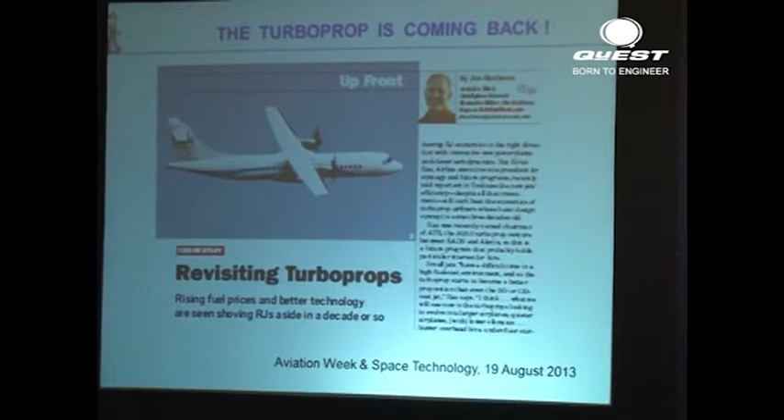Rising fuel prices and better technology are shoving regional jets aside in a decade or so. 10 years - 10 years is all that this man gives for regional jets. And he says those regional jets will be overtaken by turboprops. Well, I think that's likely. I mean, this is in fact what some of us have been feeling.

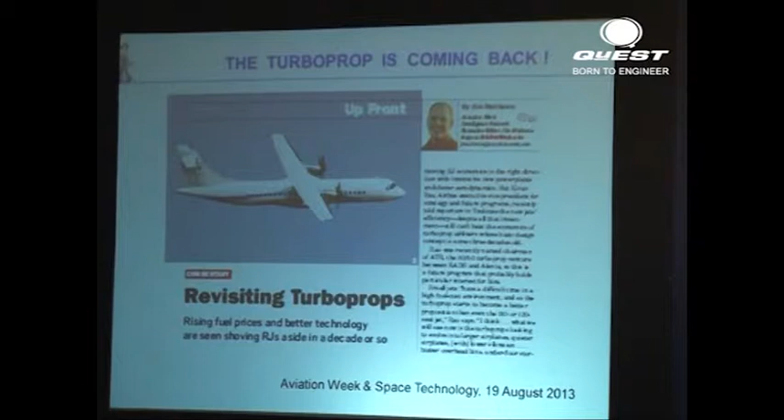Another person who feels the same way is Kota Harinarayana. So we've been feeling that the turboprop needs another very close look. It is true in some sense that turboprops are relatively old technology, because the ones flying now were designed 20 years ago, 15 years ago. Some of the advances made in all these disciplines have not actually been fully exploited in turboprop design. So I want to tell you what we should do, and what I'm going to talk about today.

In the first place, the world is turning towards greener aviation. Climate change is a serious concern, and greenhouse gases, although the contribution of aviation is very small, a few percent, 2% or 3%, everybody has to be greener. I already said that the turboprop is inherently more efficient.

If you look at the structure of civil air traffic in India, and I'll come to that in a moment, it is dominated by routes shorter than 1,000 kilometers. Especially if you look at tier 2 cities and towns, the distances are actually much smaller. The turboprop has this perception problem, but I think today it's possible to design a truly modern turboprop. It's not only modern inside, but it will look modern outside as well.

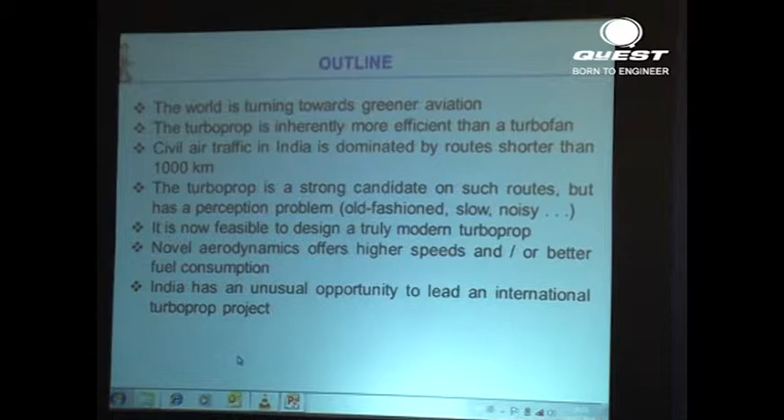Some of the aerodynamics that I'm going to describe widens the range of choice we have in aircraft design. We can use this kind of aerodynamics either to increase your speeds, if you think turboprops are too slow, or improve fuel consumption if you want to fly at the lowest cost possible.

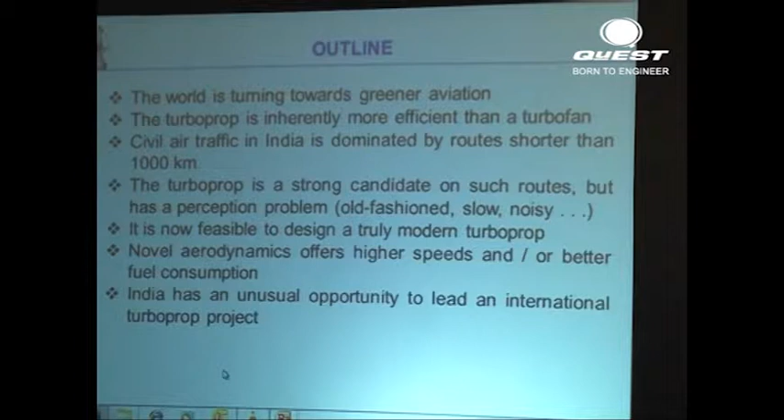Because our market is so large and it's growing, given the right policies in civil aviation, I think India has an unusual opportunity here to do a project which can be internationally interesting.

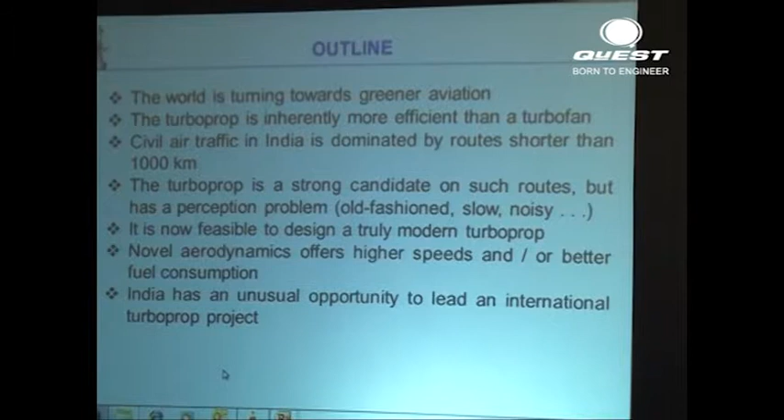Let's see, page down, is it? Okay. Okay, I see, all right.

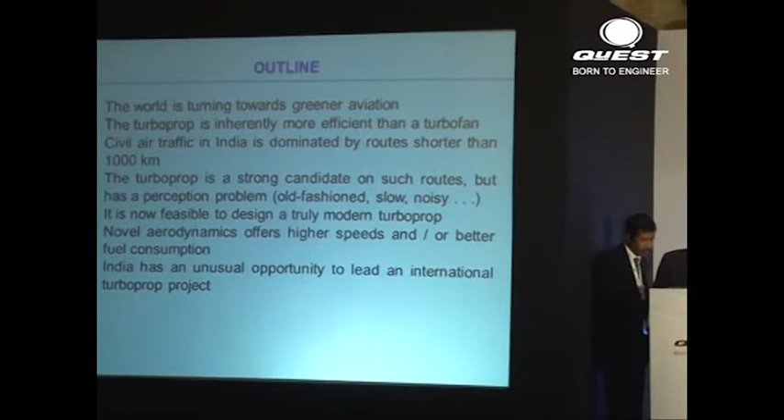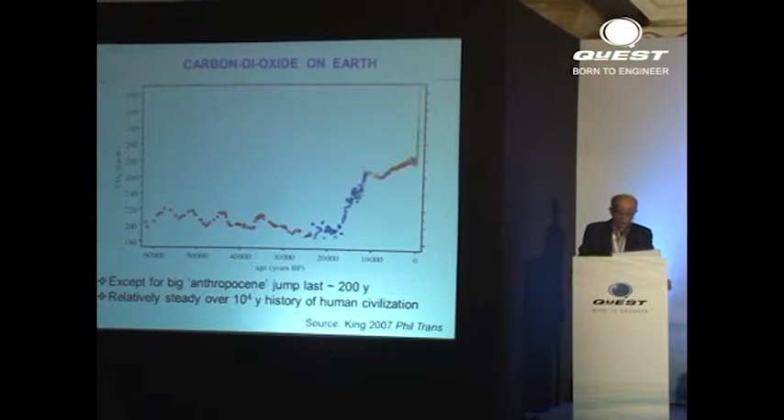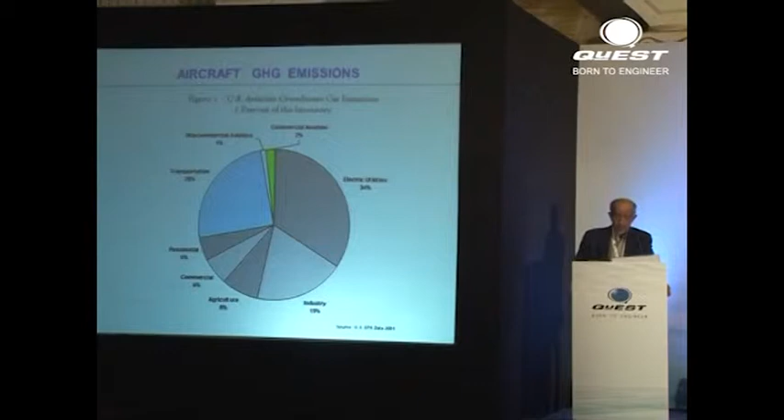So let me say just a few words about green aviation before going on. That's the way CO2 in the atmosphere has been increasing. You see that last thing out there to the right, that's how it has increased in the last 150 years since the Industrial Revolution. A lot of analysis made by huge international groups shows that the chances this will change our climate are getting stronger as time goes on.

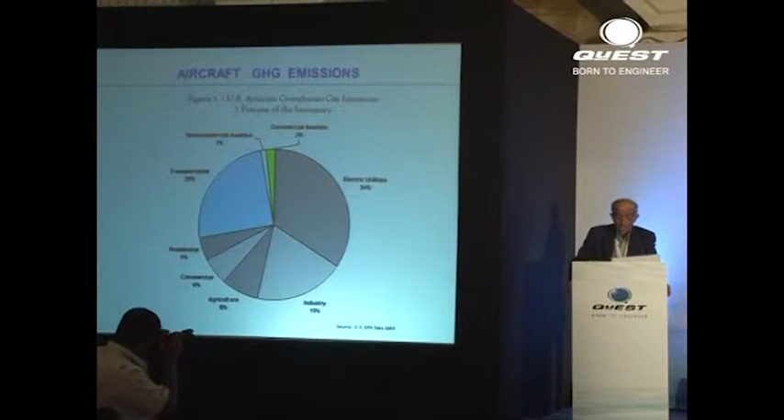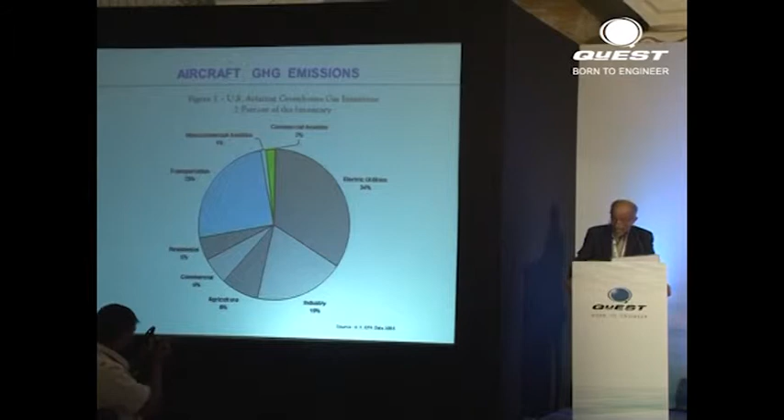If you look at commercial aviation, it contributes only 2% to greenhouse gas emissions. Nevertheless, everybody will now have to chip in, and therefore greener aviation is a major project.

So the temperature of the world is likely to go up by the middle of this century, the 21st century. It will be 2 degrees, 3 degrees warmer, and may eventually be as much as 4 degrees by 2100. That can make huge differences to the climate of this world. And oil prices, as I said, have been fluctuating, are now quite high, and all of that changes the economics.

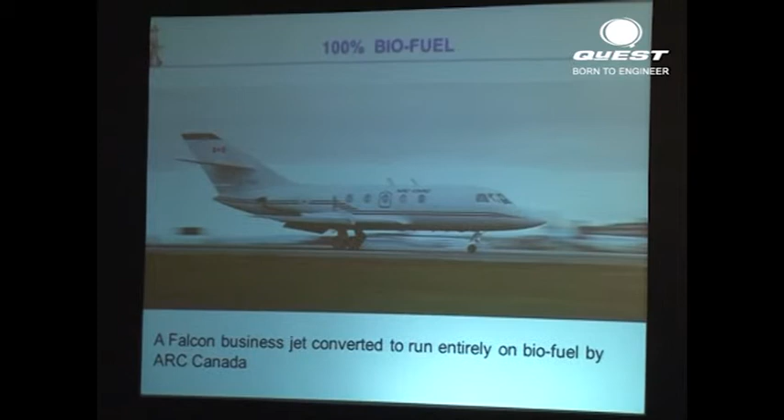NASA has a SUGAR project, subsonic ultra-green aircraft research, all kinds of sugar, as you can see. Free sugar, refined sugar, super refined sugar, and so on. They're also looking at how you can make aircraft greener, for example running it on biofuel. Here's an aircraft, a Falcon, which has run entirely on biofuel, on a project in Canada.

Here are some stranger aircraft. Look at that solar aircraft at the top. Lots of propellers, by the way, a whole series of them, you have to count them.

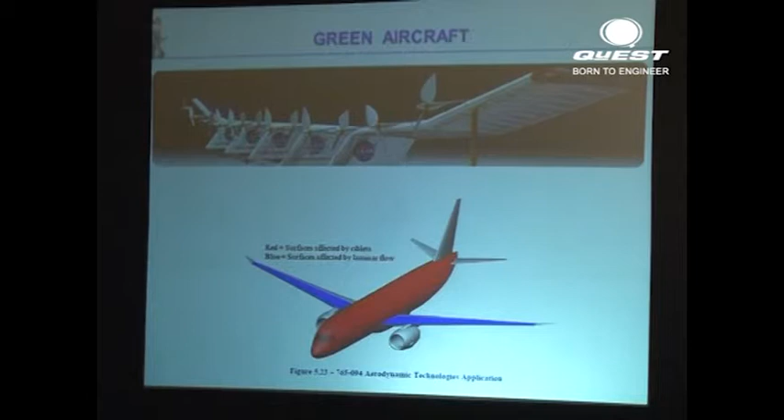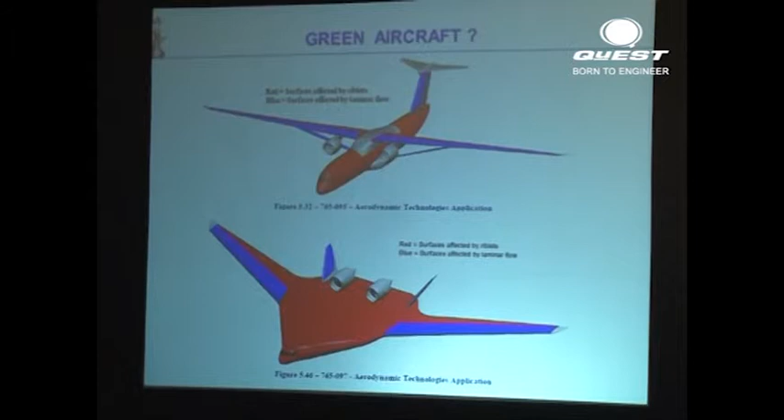There are other methods of improving aerodynamics. Riblets, for example, surface riblets are known to cut drag. Laminar flow surfaces are also known to be possible. However, cost and maintenance problems have actually hindered the introduction of these new technologies. So braced wings may come back, being structurally more efficient. Similarly, blended wing bodies with the noise from the jets shielded by the two tailplanes. So there's a whole wide variety of concepts being considered now.

Now, what can we do in India? We can wait for those green products to arrive from abroad, or we can develop our own green technologies and join green efforts everywhere. But in aeronautics, we have an opportunity now to make green coincide with being economical, which the Indian public loves, and being profitable—otherwise it wouldn't be done. So I think there is a unique opportunity here.

Fuel accounts for a considerable fraction of the direct operating cost in India on aircraft. It is heavily taxed by international standards. And partly because of the policies and partly because of the taxes, the funny thing is that the presence of Indian Airlines in foreign skies now is less than what it was when I first came to the United States. It's astonishing. It's a smaller fraction now than it was in the 1950s. In recent decades, it's steadily gone down.

I think our deregulation has, of course, lowered fares, which is a good thing. It also has lowered profits, and many airlines have actually lost huge sums of money. But I think part of the reason for these problems are also technological and business-related. And I want to look at the last factor a little bit more.

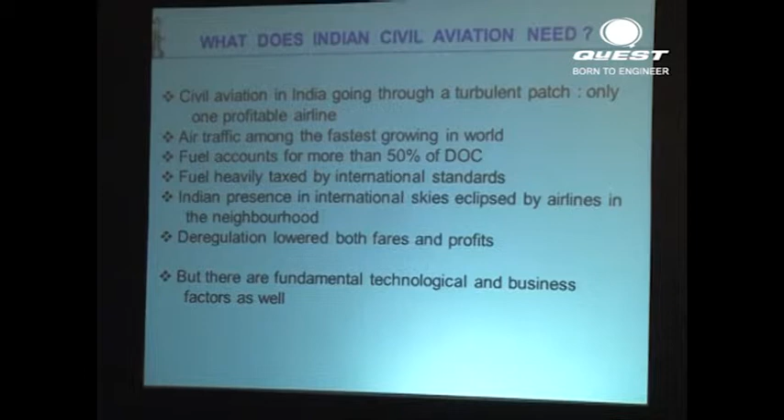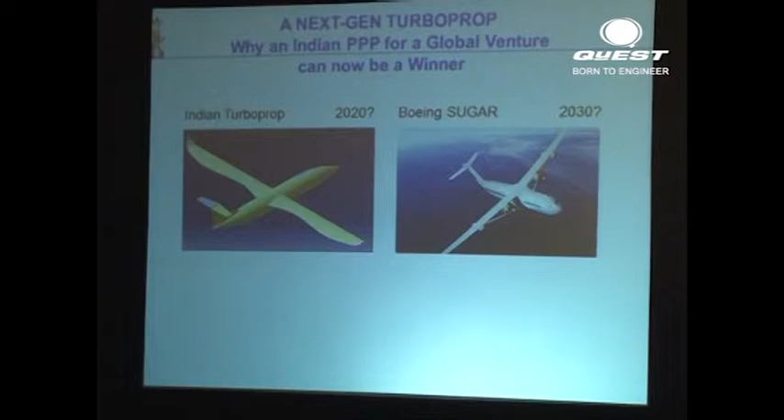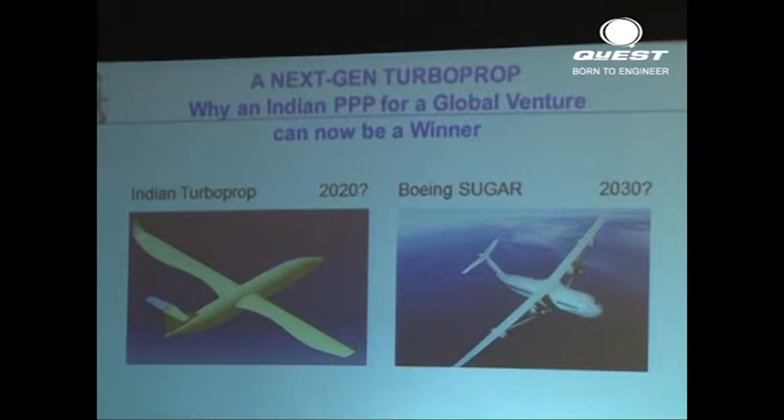I want to say a few words about what a next-generation turboprop might be like. On the left there is a turboprop, which is the kind of wing that we are proposing. By we, I mean a team of us who worked on this project. That team includes my colleague, Professor S.M. Deshpande, at JNC, Dr. Praveen, who is actually at TIFR, in the Center for Applicable Mathematics, also in Bangalore, and Rakshit. Rakshit joined me as a student, worked on this project, and is now with Airbus right here in Bangalore.

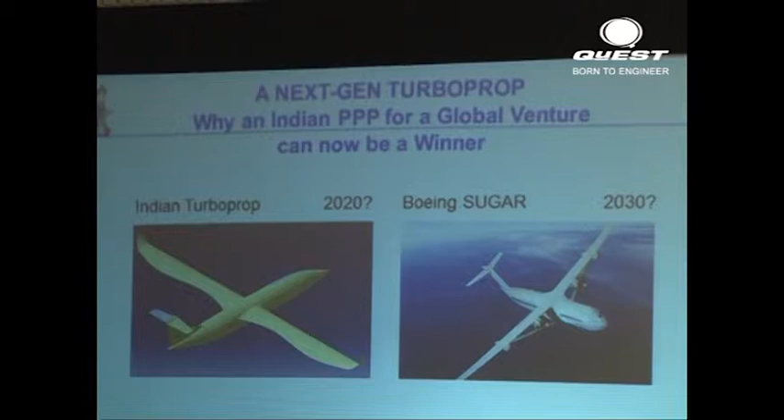So a wing like that, the one that I have shown on the left, is something that actually provides us with more opportunities for reducing drag or increasing speed, as I said. And I'll show you why in a few minutes. So let me go through this.

Nobody can make a successful aircraft in the world now unless it sells in Asia, because it's one third of the market. And the people who have seen this right away are the Chinese, who have a huge civil aircraft industry now, growing very fast. India has been very slow to see this. We still don't have a significant civil aircraft project at all. But if one third of the aircraft are being sold in this part of the world, sooner or later, we will have to start making our own.

If you particularly look at the structure of Indian traffic, what is plotted here on the y-axis is the number of seats per week in thousands, that Indian Airlines carry today. And on the x-axis is the route length in kilometers. Now the peak occurs at 500 kilometers. Now 500 kilometers is good turboprop territory. Really, a jet is not very economical at all at 500 kilometers.

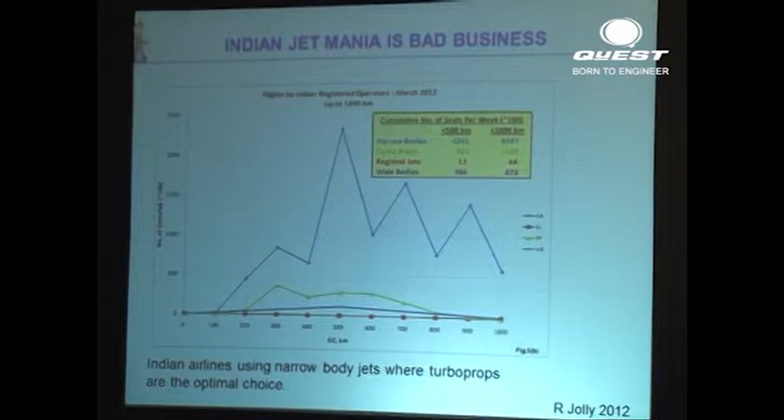But what are we doing? We are actually flying these 500-kilometer routes using narrow bodies. Even regional jets are a very small fraction. In fact, they're so small that they just hug the x-axis here. Turboprops are the green ones. That's the second curve from the top. You can see that the number of turboprops is pretty small.

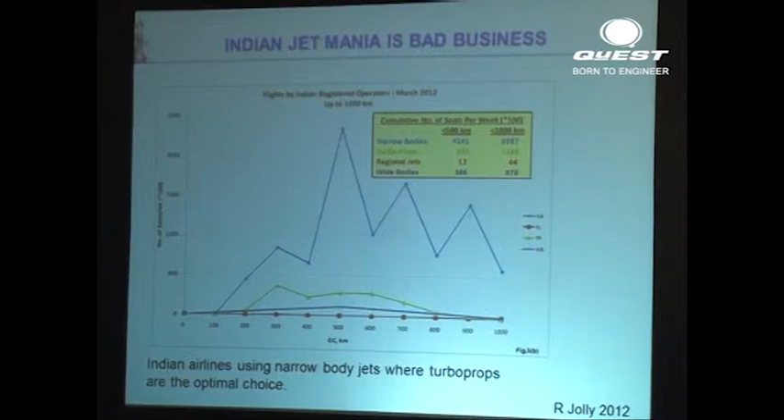We are using the wrong aircraft for the route structure we have in our country. As you go towards 1,000 kilometers, regional jets and narrow bodies do become appropriate. But just because we have these, and just because the law requires that you fly a certain kind of route, we use the same aircraft for all routes. Doesn't make economic sense.

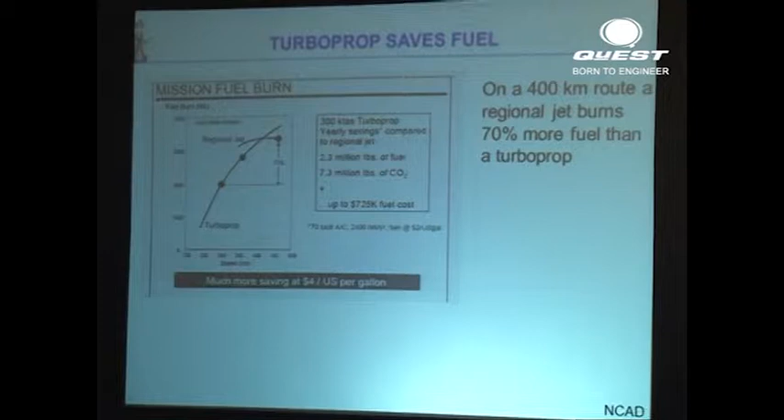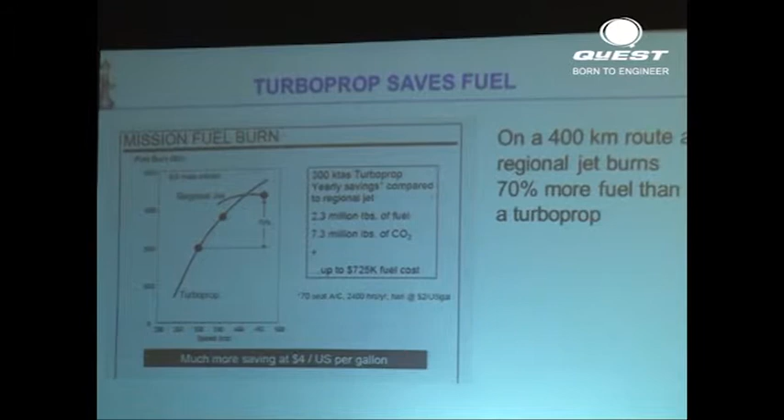On a 400-kilometer route, which is quite common in India, a regional jet burns 70% more fuel than a turboprop. At first, people look at that figure and say, can't be right. It is actually right, because the jet burns a lot more fuel than a prop does.

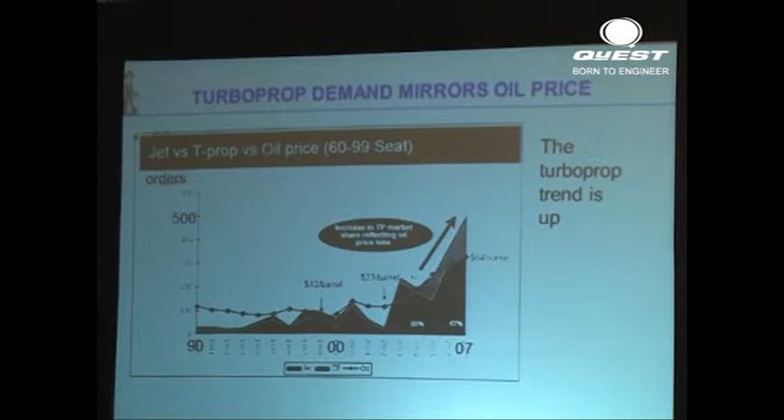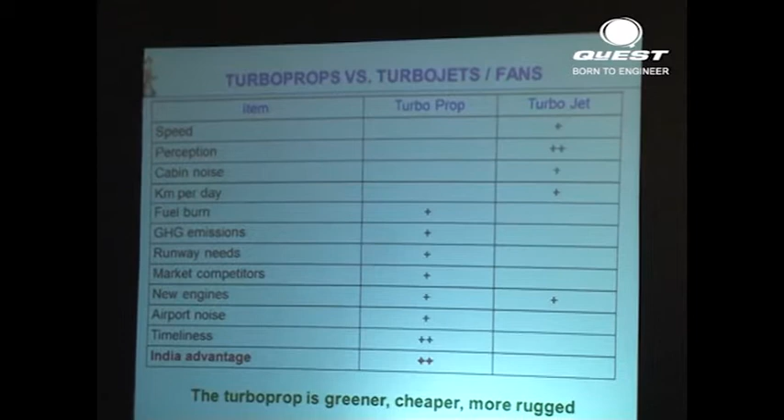Well, the increase of oil prices has increased the sales of turboprops, so now the trend is up. It's time, therefore, to look at what we can do with turboprops. What are the advantages and disadvantages of turbojets and turbofans and turboprops?

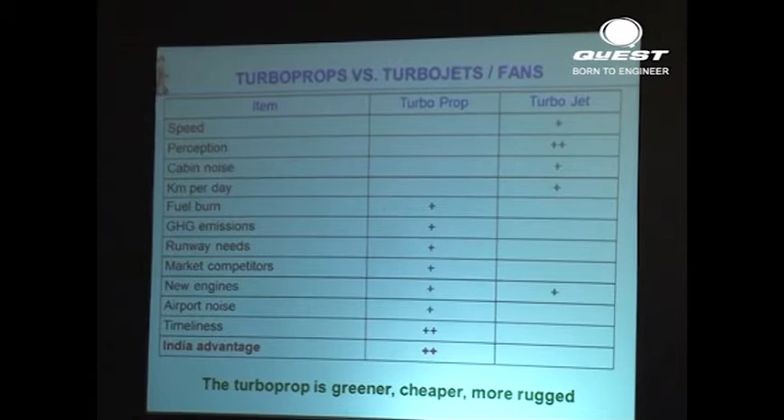Well, turbofans are faster. In terms of perception, they're seen as much more modern. Cabin noises are lower. They can do more kilometers per day. On the other hand, the turboprop burns less fuel for the same journey. Greenhouse gas emissions are therefore much less. Runway needs are simpler. There are not too many market competitors just now. And if the market is going to increase for turboprops, now is the time to get in.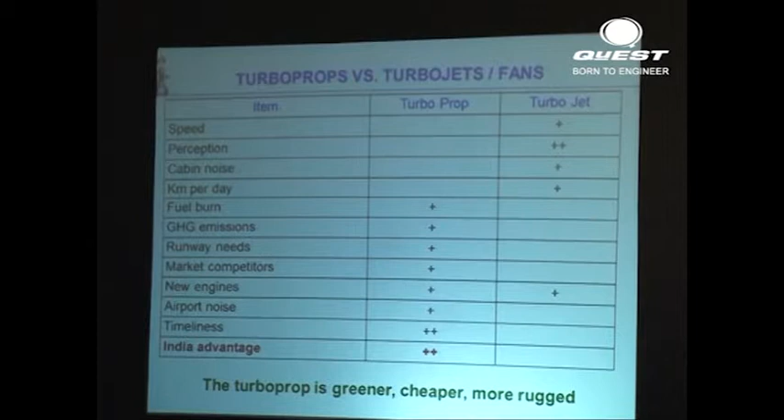New engines are actually now coming up in the turboprops as well. Actually, airport noise levels from turboprops are lower. The noise footprint of a turboprop at the airport is actually smaller than that of a turbofan. It is timely, and it is what we need.

If you look at turboprops in India now, there are two of these. They sort of represent two different ways of looking at what a turboprop may do. This is a kind of economical turboprop, the ATR 72.

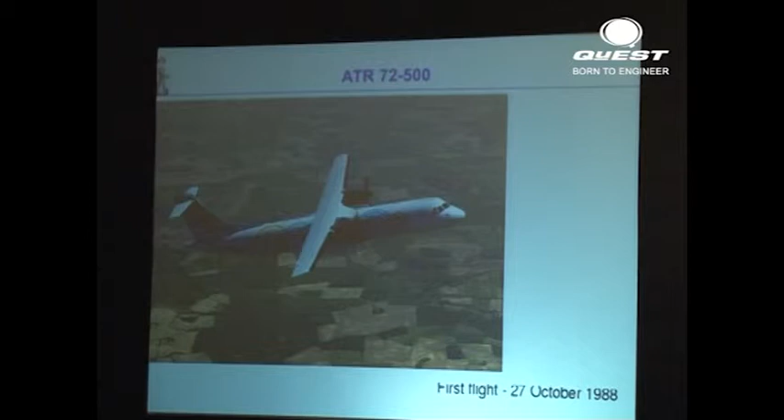You see a lot of them in India. This one is a Bombardier Q400. You're beginning to see them in India now. SpiceJet has bought several of them. The Bombardier is more expensive, carries some 10 passengers more or so,

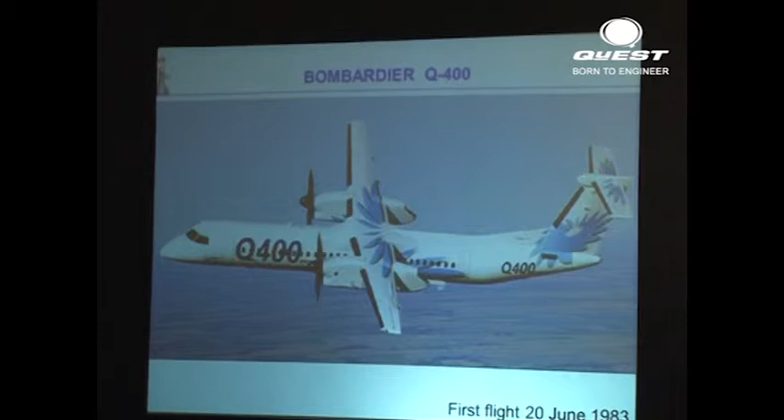is 1/3 faster. Because it's faster, it can do more trips per day, so it's slightly more productive than the ATR 72. It is 1/3 more expensive. But if you look at the ATR, it is cheaper to fly, slightly smaller, and in terms of economics, there's nothing to beat the ATR.

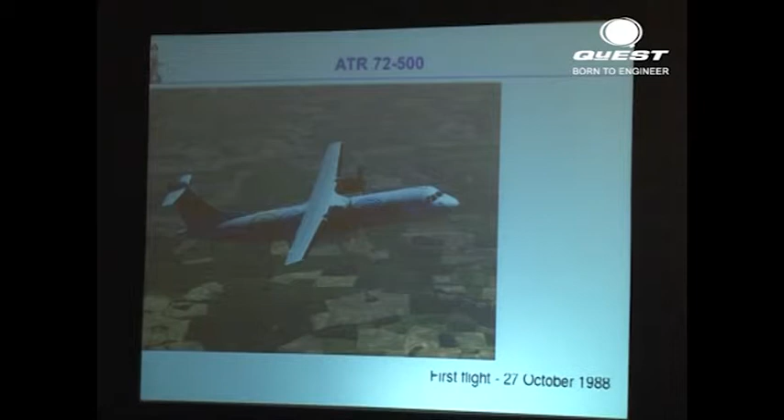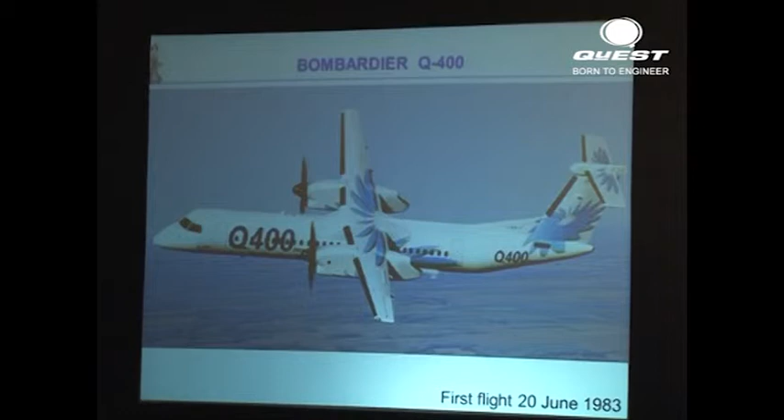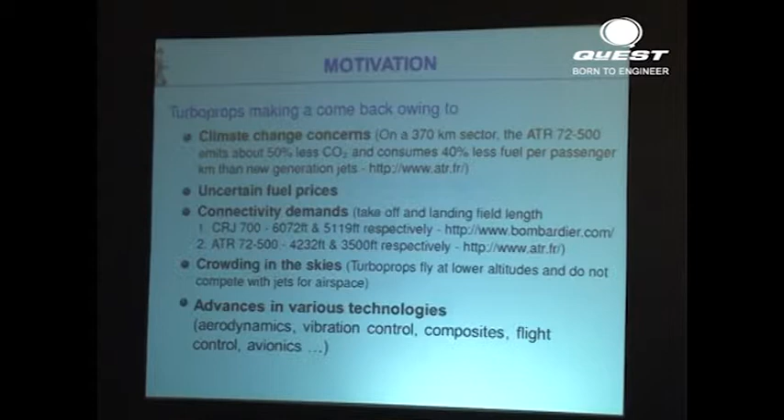The ATR largely operates over Asia and Africa and so on, whereas the Q400 operates over the richer countries of the world. It's, as I said, begun in India. This was one of the things that we talked about a great deal, like the RTA 70, without, however, the new wings.

I've already talked about this, so I will not spend a great deal more time. Let me just tell you certain kind of facts about turboprops. In spite of the fact that turboprops are more popular in Asia and in Europe, I think it has to do with the structure of how far the cities are, the average intercity pair distance. You can see that, once again, it splits roughly 1/3 each between North America, Europe, and Asia.

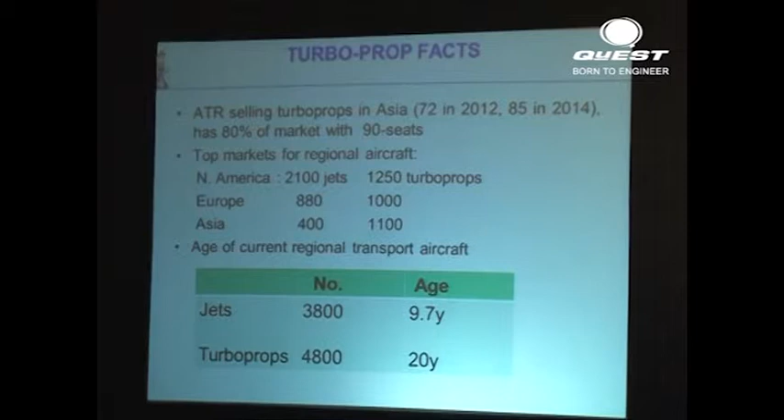Now, current jets are only 10 years old. Current turboprops are 20 years old. So there's actually a good market for turboprops if one is made today.

Now, what we need to do in order to make a good turboprop is a judicious mix of economy, comfort, novelty, green appeal. So can we put together all of this into a new design? That's the question that we have to answer.

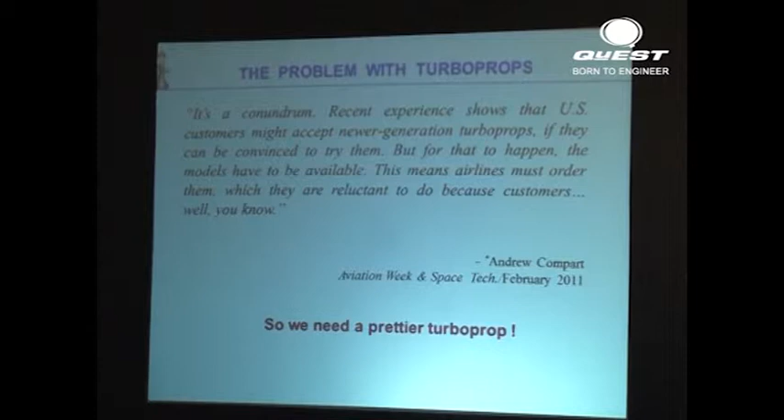US customers may accept newer generation turboprops if they can be convinced to try them, that's what this man is writing. But for that to happen, the models have to be available. This means airlines must order them, which they are reluctant to do because customers, etc. We're caught in a vicious cycle here, and we have to break that vicious cycle.

Now, this new aerodynamics is what I'm going to describe to you. There was a mention of computation. It started by mentioning computational applications in engineering. This is one such computational application in engineering.

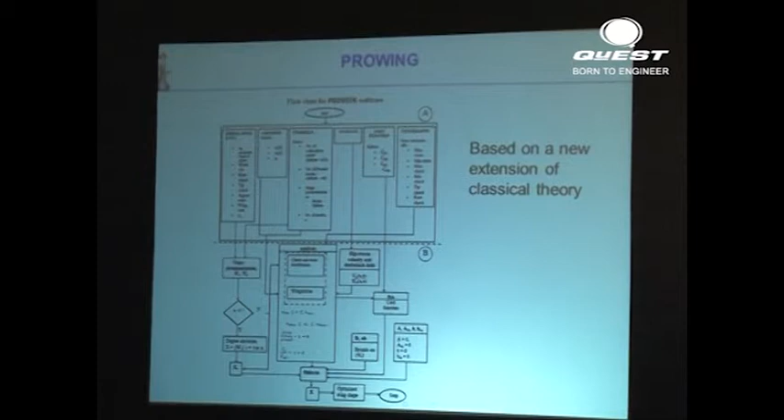Looking at how you optimize a wing for a turboprop. Now, that's the kind of software we developed. Everything is done in-house here, written in my group at JNC. I won't go through the structure of that thing, but I'll show you the kind of results we get.

What it does is this. Let me tell you what the principle is. If you have propellers—so will you please tell me when I have 5 minutes more to go? If you have propellers in the tractor configuration mounted ahead of the leading edge, there's a slipstream going past the wing. From one point of view, the slipstream, because it's moving relatively faster, is energy wasted.

It's gone. But it's not as fast as in a jet. So although energy is gone in the slipstream, you don't lose as much energy in the slipstream as you do in a jet. However, there is that energy, and most wing designs don't make use of that energy. And the idea is whether you can make use of that energy and try and find out what kind of wings would make the best use of that energy.

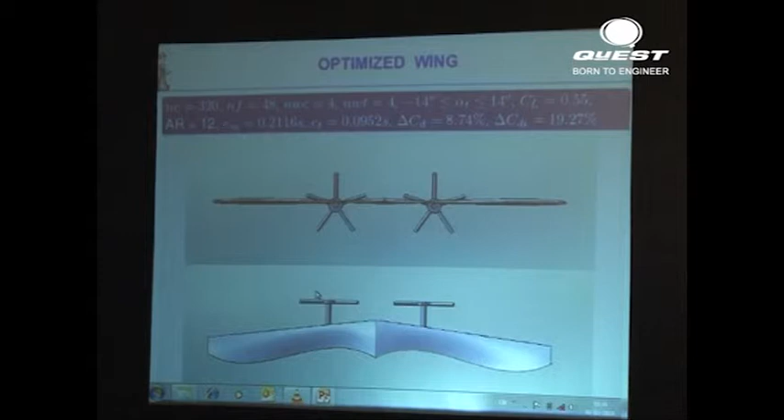It makes physical sense because the slipstream velocity gives you higher dynamic pressure behind it on the wing. And therefore, if you're looking at lift distributions, if you have the same angle of attack, there will be more lift behind the slipstream because the dynamic pressure is higher. Now you say, well, I want it such that the induced drag should be minimized. Then it says the right thing to do is to cut down the load that you would otherwise have had behind the propeller when you take the slipstream into account.

Well, when you go through all of that and optimize it, you get this kind of wing. Now, I must say that the way that the wing shape has been parameterized in this optimization routine is to make relatively graceful curves on the trailing edge. You don't have to do it. You can do it with linear segments if you prefer. If you wanted flaps and other kinds of control surfaces on the wing, you can make it with flat stretches of the wing, of the trailing edge. But still, the chord will be lower behind the propeller than on either side.

Now, this one gives us a reduction. This reduces the induced drag by 20%, 19.27%, and reduces the total drag by 8.7%. Well, that's not small. You know, if you're talking about winglets, you're talking 1-2% drag reduction. So it's possible, actually, to get substantial reductions in drag.

Now, how you use that reduction in drag is up to you, up to us, up to the designer. I can trade it for speed and say make the turboprop travel faster. Or I can trade it for fuel consumption, and at the lower speed, make everything cheaper. Either thing is possible.

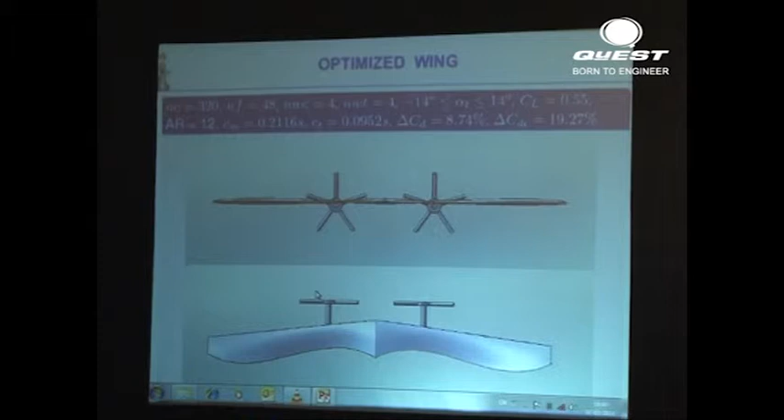So we went ahead and designed a whole series of wings of this kind with various constraints. Now, we combine twist and chord distribution. And the twist distribution is shown here, highly exaggerated. You're looking at it from behind the wing, behind the trailing edge. So if it's black, it means the wing is twisted up, the chord is twisted up like that. Highly exaggerated.

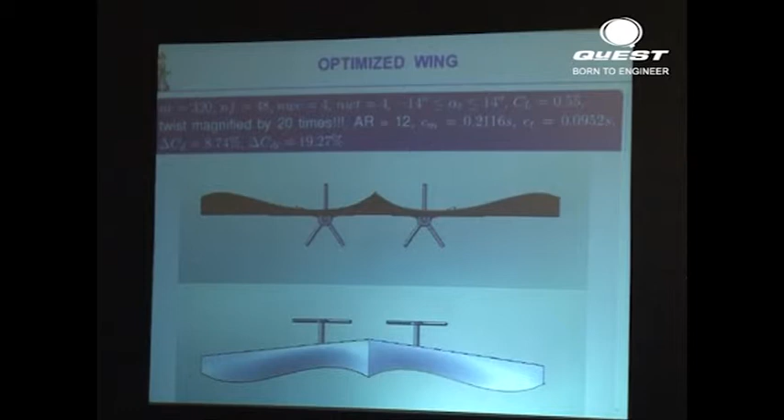So with a combination of twist and chord, you can actually make substantial reductions in drag. This is a more exaggerated case here. You can see that in this particular case, the induced drag reduces by 32%, and the total drag by 14%.

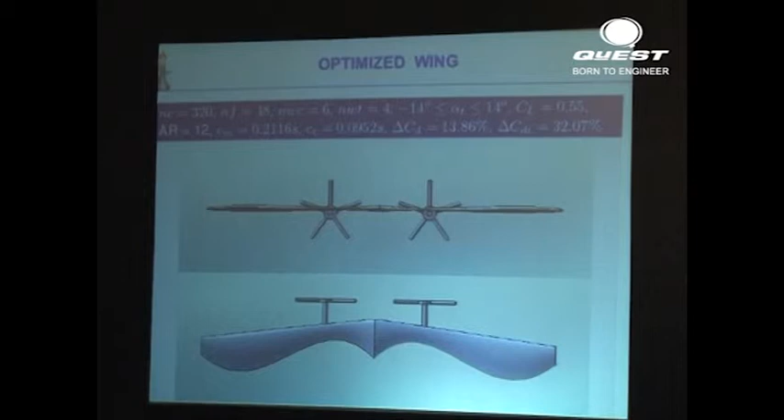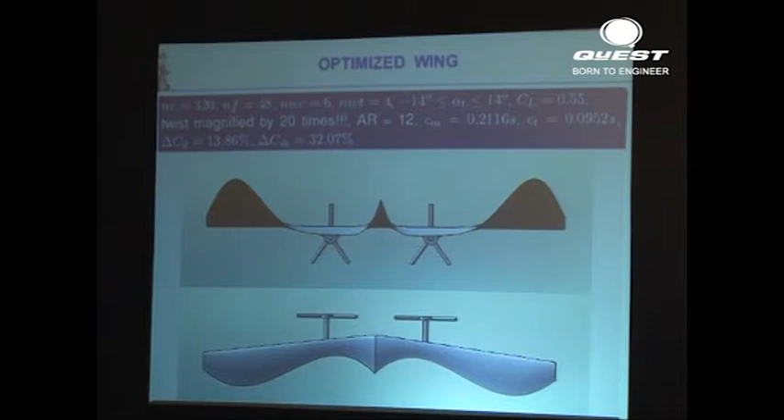However, structural engineers will say, well, that looks impossible. I mean, that chord behind the propeller is very narrow. And so we have looked at some structural criteria as well. So I can go through a series of wings. You can see how the twist is made here. It is down behind the propeller and up at the tips.

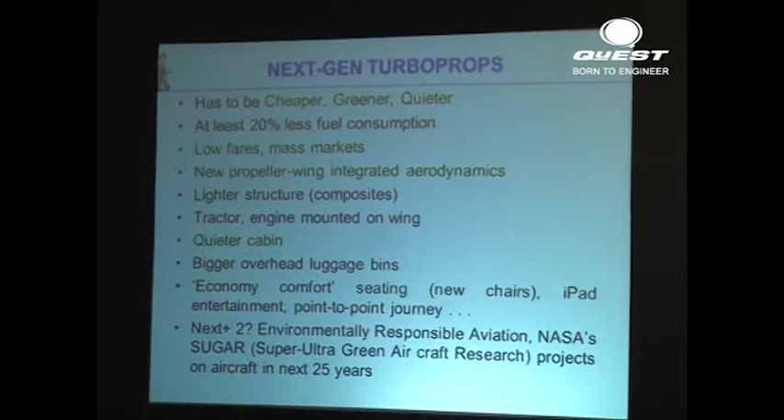So if you wanted to make the next generation turboprop, this is what I think it should be. Cheaper, greener, quieter, at least 20% less fuel consumption, low fares for mass markets, new propeller wing, integrated aerodynamics. You see here, the propeller and the wing should be designed as one system. They're not two different systems because the propeller influences the wing design and the wing design influences the propeller.

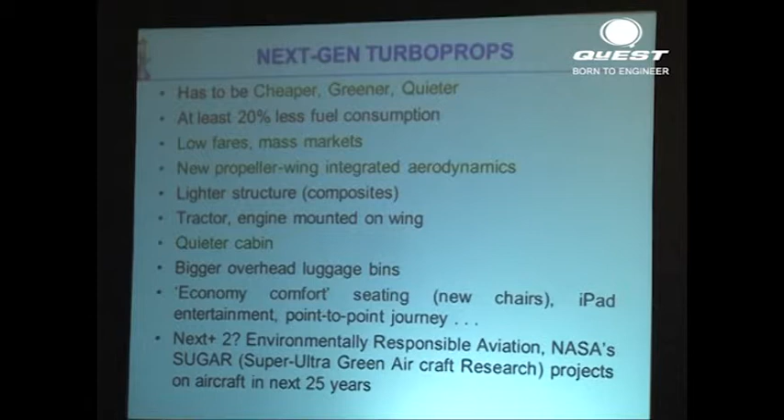Quieter cabin, bigger luggage bins, economy comforts, all kinds of new developments, incidentally, in chairs, in seats, which are now sculpted to suit the human body. That's to say, the passenger sitting behind gets a little more leg room. Entertainment. I think there are a whole variety of areas where you can actually introduce many novelties, many innovations in turboprop design.

So you can ask yourself, what is the maximum reduction that you can make with this kind of approach? It turns out the maximum reduction you can make in the induced drag is close to 13%. But the design which gives you 13% is a crazy design. It will be, from other points of view, totally inefficient.

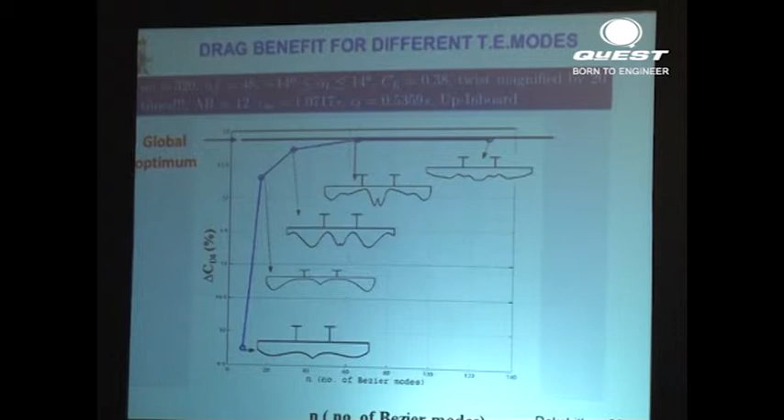If you look at the ones at the top, they have such crazy trailing edges that they will be structurally impossible. So the structurally possible ones are all around here, the smooth trailing edges. And so if you get 10%, 12%, it seems possible with structurally viable designs.

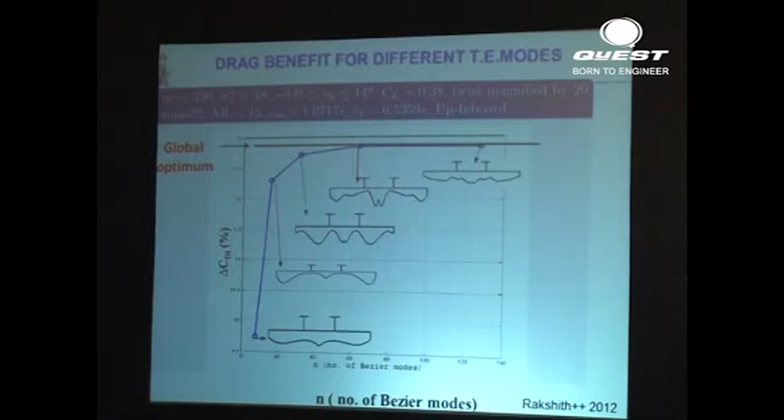So we designed a variety of wings. You can see what is called C there up at the top. It has linear segments for the trailing edge. So if you wanted to put in a flap or something, that kind of design is OK.

Then the structures people say, well, it would be nice to have a linearly span-wise decreasing thickness along the span, because then we can put a spar there. This wing will not have a linearly decreasing thickness. So you can change your optimization criteria, and you can see B there. Whereas what is at the bottom shows how it may be if you don't do that. So you can do a variety of things.

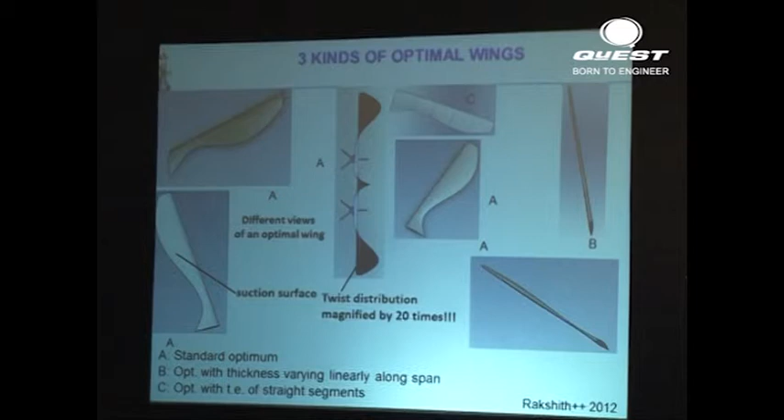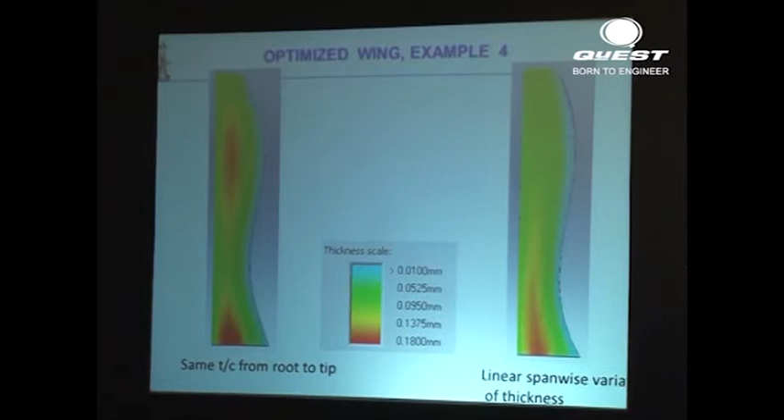And we made designs with the root bending moment as a criterion. All of them, here it is. You see the one on the right here is one where the thickness, not the thickness to chord ratio, but the thickness decreases linearly along the span. Possible. More or less the same shape. Slight modifications, but it's entirely possible.

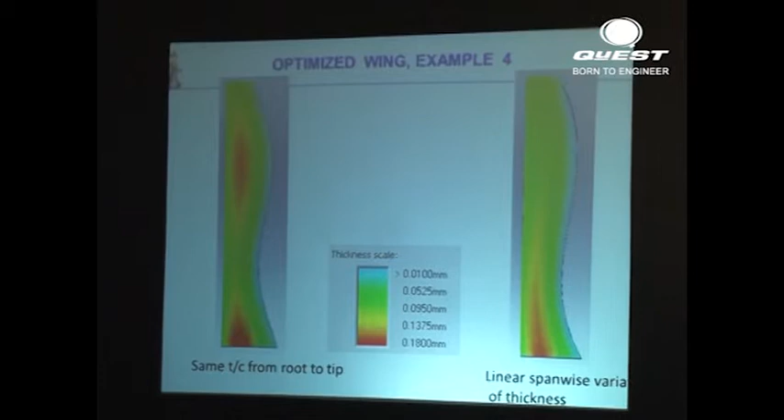So then, you see, all of this was sort of lifting line theory put into optimization. But then, if the aspect ratio is not so large, and in any case, these days, you won't necessarily do it by lifting line because you want to optimize the chord as well. Suppose you want to optimize the whole surface of the wing, not just the plan form, as we're doing till today.

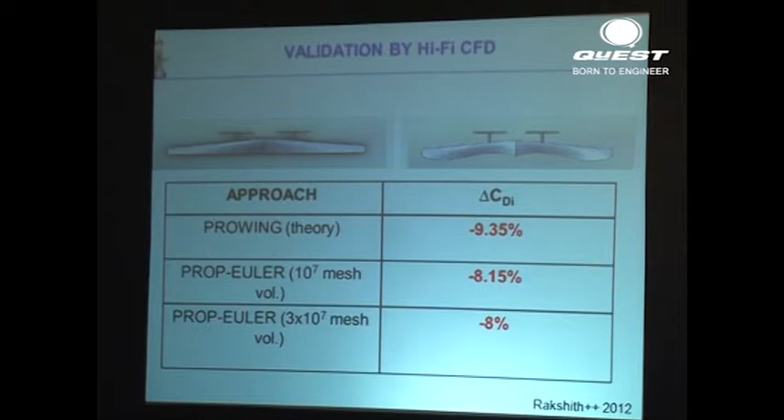So we've done that with an Euler code. So that's the hi-fi CFD here. And first we compare the results we get from the Euler code with what we get from the lifting line theory. You can see that the lifting line theory predicts a 9.3% induced drag reduction, while the high fidelity, high mesh point Euler code says it's about 8%. So there is a certain reduction depending on the aspect ratio, but it's still very substantial, and the two things are close.

We actually did the same thing with RANS codes. You do that with the RANS code, and you can see that you get about the same kind of reduction, the same ballpark.

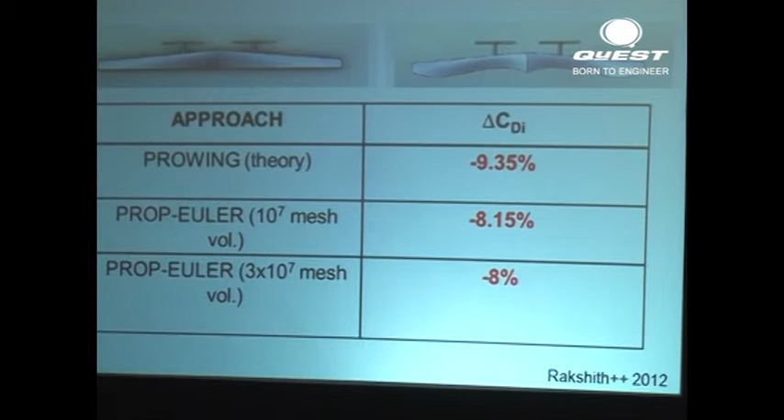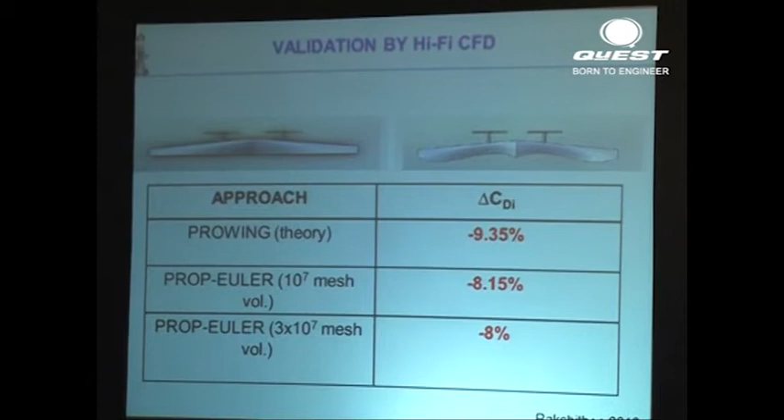Then we did, so another student, Milind Dhake, actually now has written a code which will optimize the whole surface of the wing, okay, both chord-wise and span-wise. Well, that has given results broadly consistent with what we are saying here. And so if you wanted to design the aerofoil as well as the plan form all together at one stroke, that also can now be done.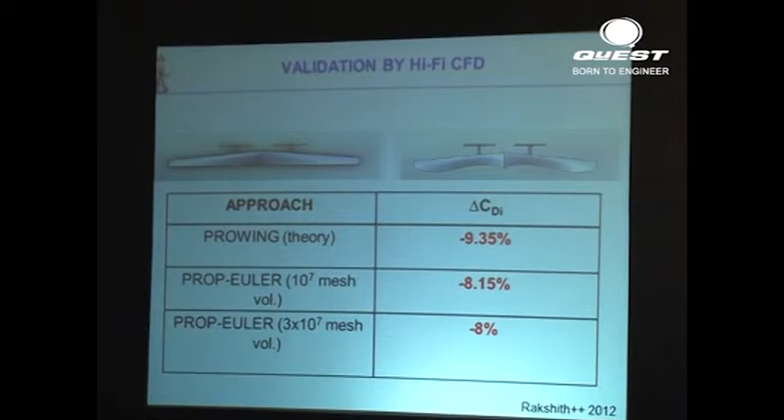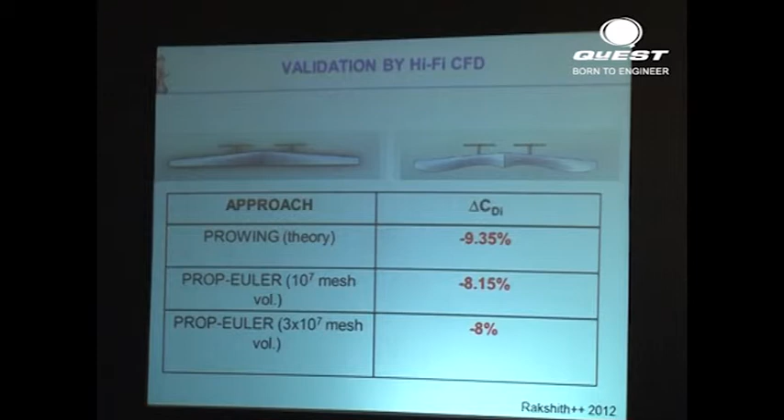And all of them basically confirm the physics behind this. The numbers are very similar, even as the aspect ratio is much smaller, when the lifting line theory would not be so good. So 8–9% is something possible for feasible wing design.

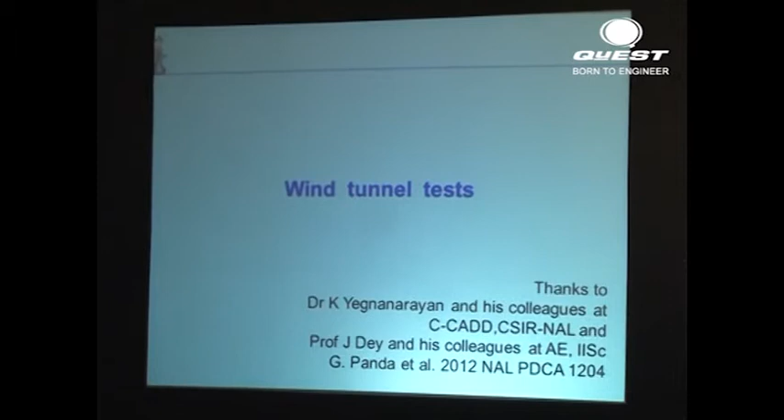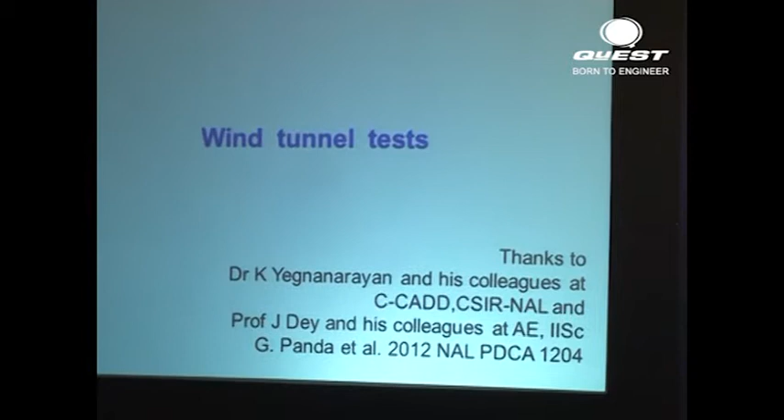So we actually made some wind tunnel tests as well. And I must thank my colleagues at NAL for getting this done at the Institute of Science Tunnel, so I'm very thankful to them. And incidentally, all of this was done as a project from NAL. I must also say that. So I must acknowledge my gratitude to NAL for saying, okay, go ahead, and let's see what we can get in terms of new wings.

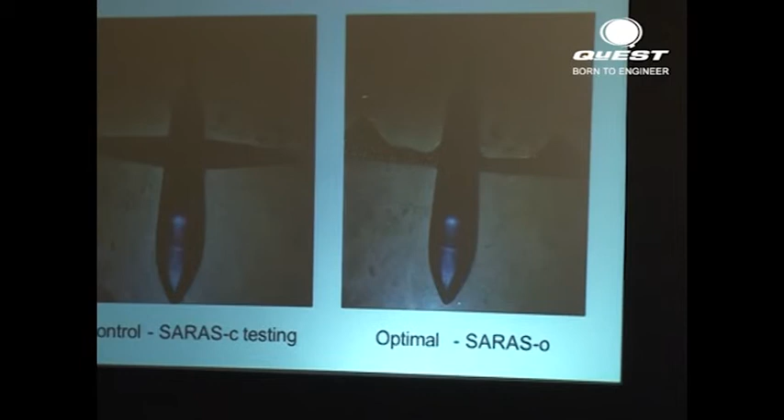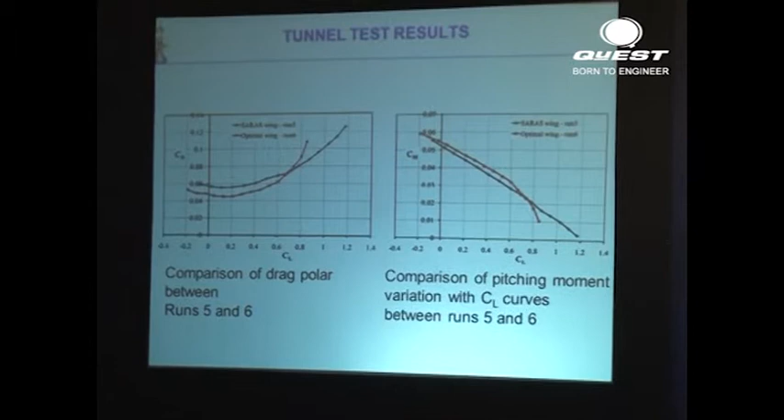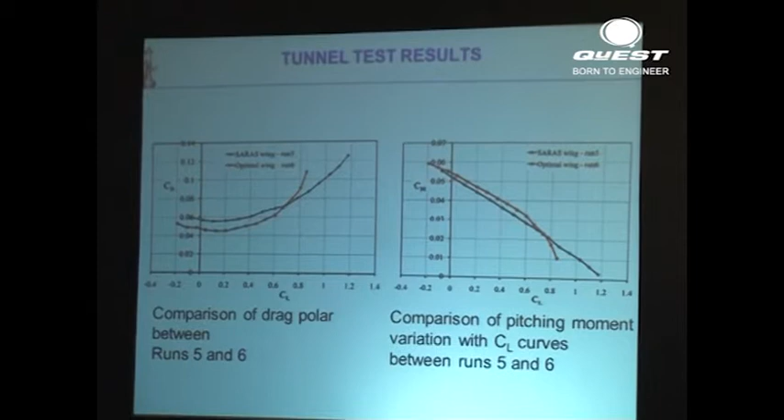Now, the greatest surprise here, okay, we took one of the earlier designs, Saras, that was there at NAL, changed its wings, and then we had the old wing and the new wing, put it in the wind tunnel, and tried to find out how much we would save. Now, the greatest surprise here was that the reduction in drag we achieved in the wind tunnel was higher than predicted. Normally you expect, per theory, you get some reduction. But it turned out that the wind tunnel actually gave a higher drag reduction. So now we have the other difficulty of trying to understand why it is higher in the wind tunnel than it is according to these theories.

Well, I think it might have something to do with transition, something to do with constructive interference with the fuselage. We're not testing a wing alone here. In the wind tunnel test, it's a full aircraft model. But what it suggests is that, if you're doing a full aircraft model, of course, this is only one test.

We have to do a great deal more tests than what we have done now. But what the single tunnel test shows is that for whatever reason, there are good chances you can actually achieve at least that much reduction on a full aircraft. And maybe you can even do better once we understand the mechanisms by which that drag reduction was obtained.

You can see here, it's almost 20% lower drag on the curve on the left. Of course, beyond a CL of about 0.7, 0.8, the drag of the new wing becomes higher. So you can ask, is it going to affect performance during climb or takeoff? Well, that depends on the lift coefficient used during climb. 0.7 is the crossover point. But the codes we have are sufficiently flexible for us to trade off what we need at cruise, takeoff, and landing. All of that can be done by optimizing our cost functions.

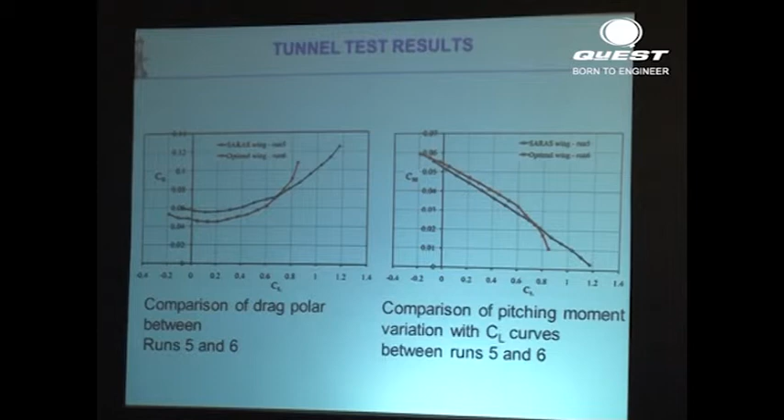This seems new, and some people we showed it to in India and outside said they'd never seen anything like it, so we filed for patents all over the world. The first one to grant it was South Korea, and we're now doing it with the US, China, and Japan.

Well, the rest of it has to do with policy. I don't think in a colloquium on engineering mechanics that's a major thing, so I just think it's possible to do it, let me put it that way. I think, however, we'll need to reorganize to do that, and that is something to talk about somewhere else.

But I would like to say why India should take the initiative. There is a very large number of appropriate intercity pairs. Our air traffic is growing. The market is price sensitive. Incidentally, while we were doing this, the word frugal innovation became very fashionable in India. We discovered suddenly that we were good at frugal innovation. We've been doing it all along. It reminds me of the man who said, I didn't know I was speaking prose all my life till you told me what prose is. So people have always been innovating, low-cost innovation, frugal innovation.

So this is one such example, particularly relevant to the market in India. But it's not just the market in India. I think the market over all of Asia, Africa, and many other countries applies too. Incidentally, it has nothing to do with the market in that sense.

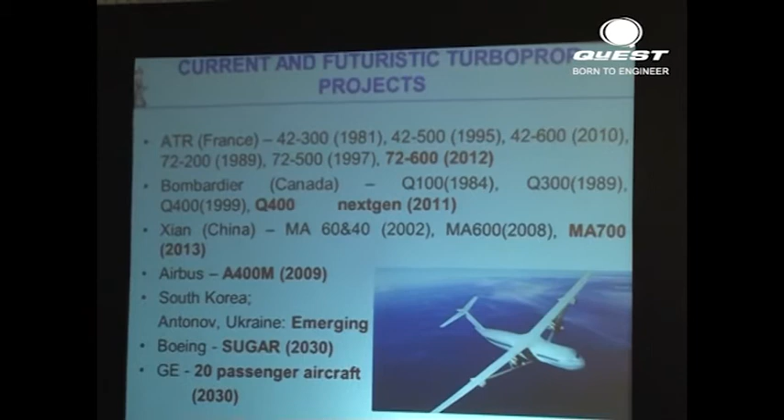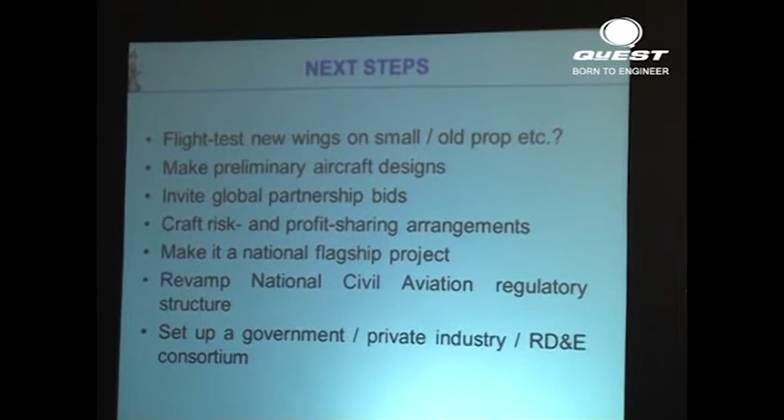Okay, I think I have here how we should do it, but I don't think I'll go through that. I think we should really make a great deal more tests, more computations. In fact, now I think we are ready for somebody to make a small aircraft with these wings. I'm trying to persuade my friends in defense. There's a UAV called Rustom which has turboprops. I hope our friends in defense... we have told them how to design the wing for the Rustom. I know one of these days they will make those wings, and we will know in flight whether these benefits are realized or not.

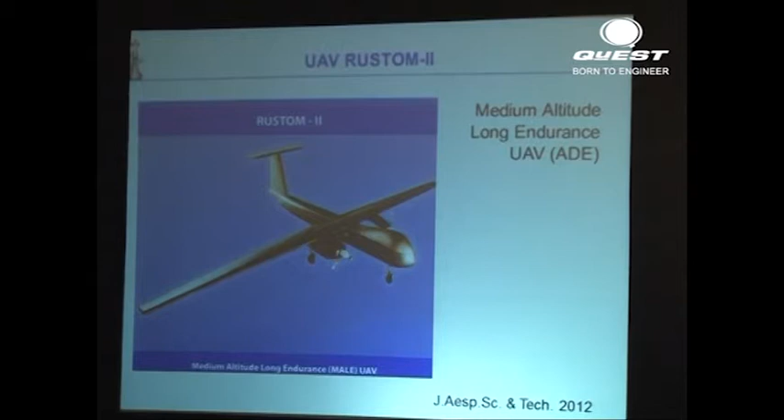So I end with the same note: the turboprop is coming back, I think. And don't be surprised if 10 years from now, the turboprop looks as natural as regional jets have for the last 10, 20 years. Thank you very much.

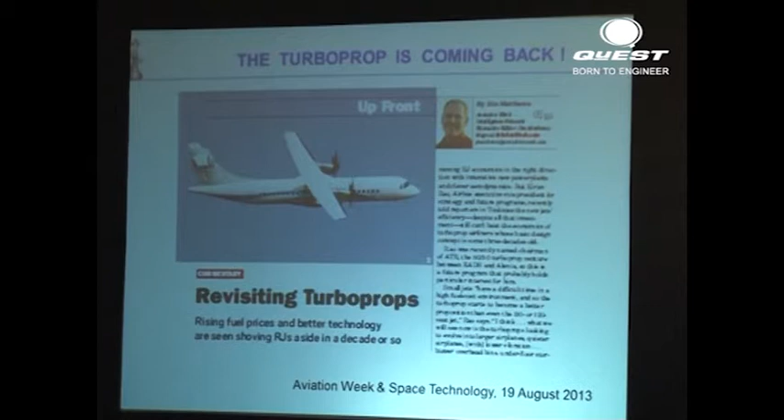Sir, you made an excellent presentation. As far as I'm sitting here, this is a topic of great interest and importance to India.

So I would like to open the floor for a couple of questions, and let me start myself. You made a very convincing statement here, there's no argument. For India, we need short-haul flights. Turboprop is the clear choice, because we are not flying coast to coast, 5,000 miles and all that. Having said that, 4 or 5 weeks back, there was still a tender from the Government of India asking for both turboprop and turbofan. So why that indecisiveness?

Okay, I know about this. I think that people who are looking at this issue are not convinced by the argument that turboprops are the aircraft of the future.

Now, I think that if you go ahead with turbofans, these are all personal views incidentally, you're following old fashions already. When we started talking about this some 5 years ago, there were people from abroad who said there's no big market for turboprops and so on. But I'm very happy to see that over the last 5 years, views are changing elsewhere in the world.